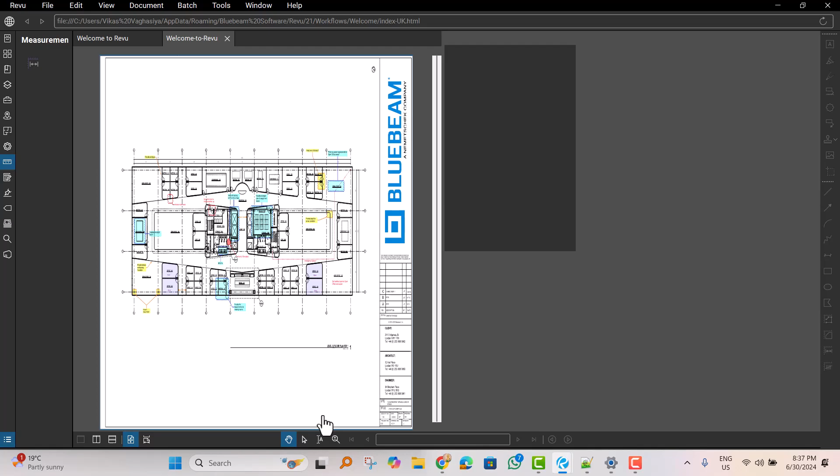First of all I am going to open the sample file. If you can't find the sample file, go to the Help menu and click Welcome to Revu, and there you would be able to find it. I am going to close this and work on this drawing. Initially I am going to remove the old markups over the drawing.

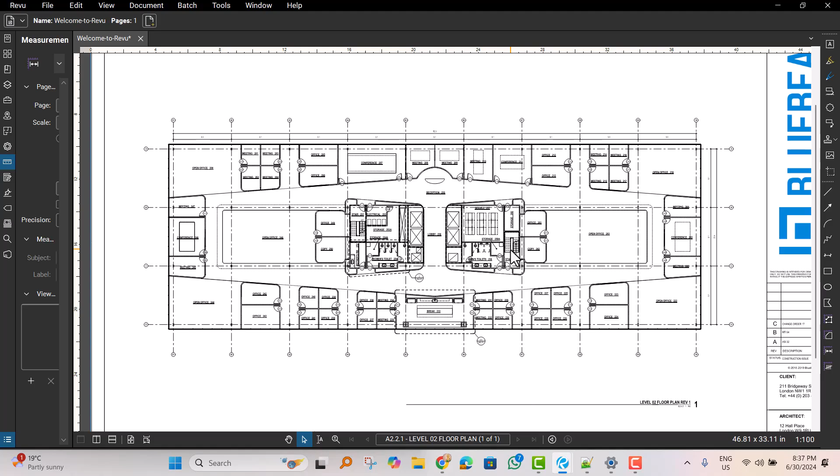First of all we are going to learn how to calibrate a drawing. There are basically two main ways to calibrate a drawing: first is based on the given scale at the bottom of the drawing, and second is with the help of given measurements on the drawing we can assign a scale. In this video we are going to look at both ways.

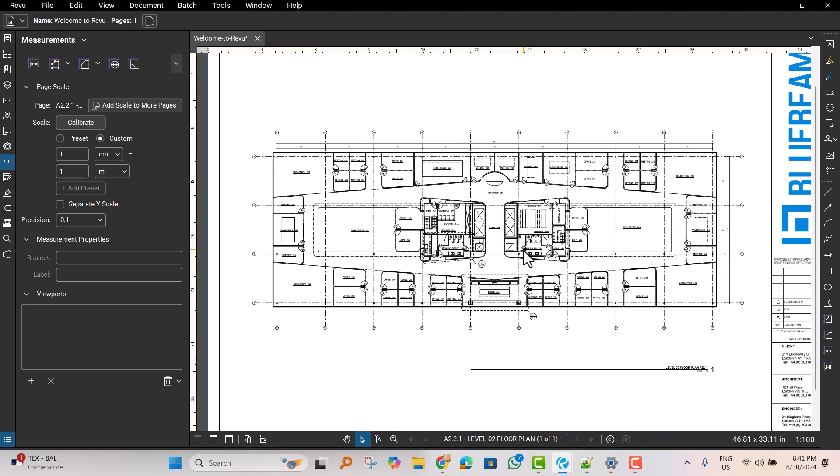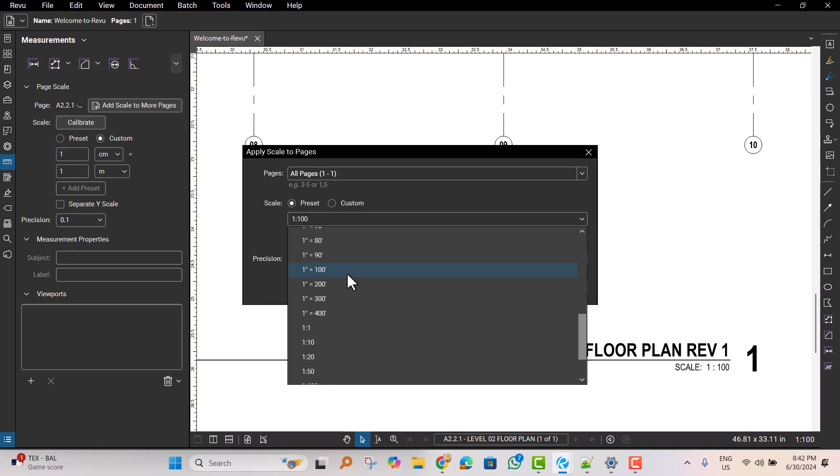Let's first see how we can assign a scale based on the given scale in the drawing. In order to assign a scale, I'm going to go to the right bottom of the software and click here, and for the pages I'm going to select all pages. For the scale I'm going to select preset, and in the different scale measures I'm going to select 1:100 as it is assigned on the drawing, and for precision I'm going to select 0.1, then apply the scale. So now this drawing has applied the scale.

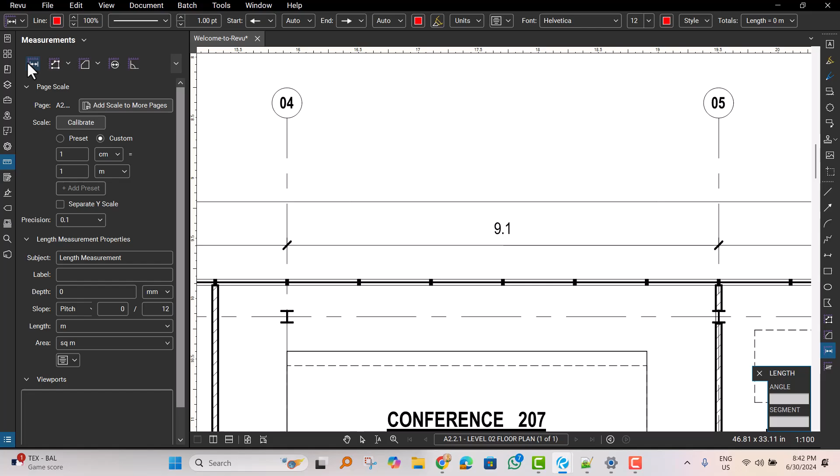In order to check if it's working or not, we can use one of the measuring tools, which is the length tool, and measure one of the given lengths, and here we can see that the applied scale is working correctly.

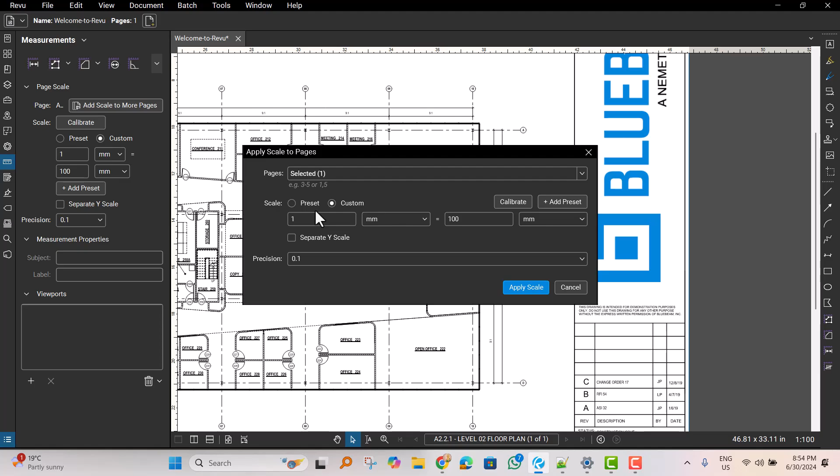Now friends, we are going to apply a scale to the drawing based on the given measurement. This method is used when there is no scale given at the bottom of the drawing. In this case we are going to take one of the longest measurements, as it can give us a more accurate scale. So here I am going to go again to the scale option, and this time instead of preset I am going to select custom, and then I will select calibrate.

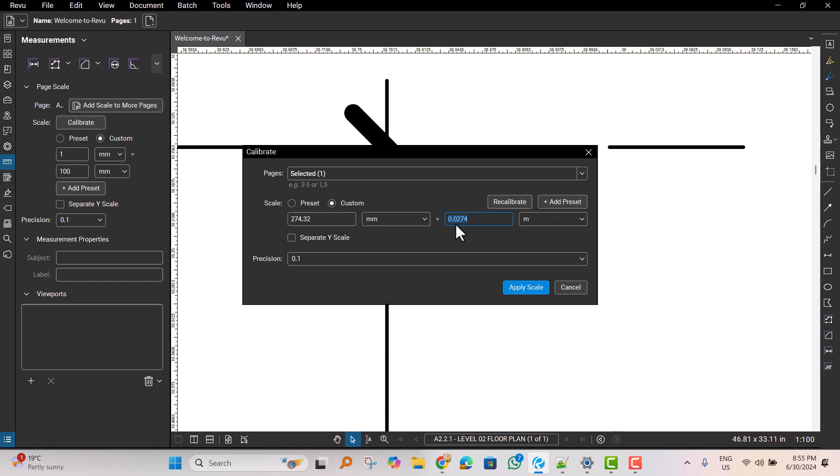I will press OK, and I'm going to select this length, 27.4, which is the longest length in vertical, from here to here. For that length I'm going to enter 27.4 meter, it will change again to 27.4, and then apply the scale. So now it has applied a scale.

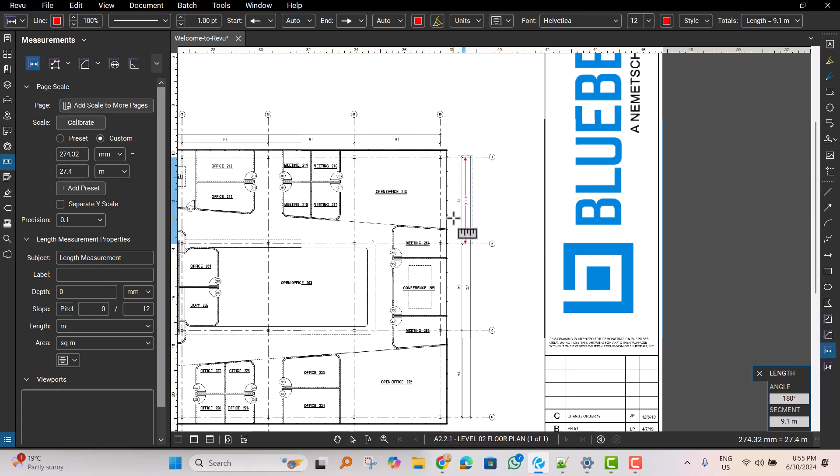I'm going to use one of the measuring tools, length, in order to measure and confirm. So from here to here we can see that it gives a length of 9.1 meter. So these are the main two ways to calibrate a drawing in Bluebeam Revu.

Now we are going to use different measuring tools in Bluebeam Revu. First of all I am going to use the length tool, which you have already seen. Before taking any measurement I'm going to look at the toolbar, where we can set the units.

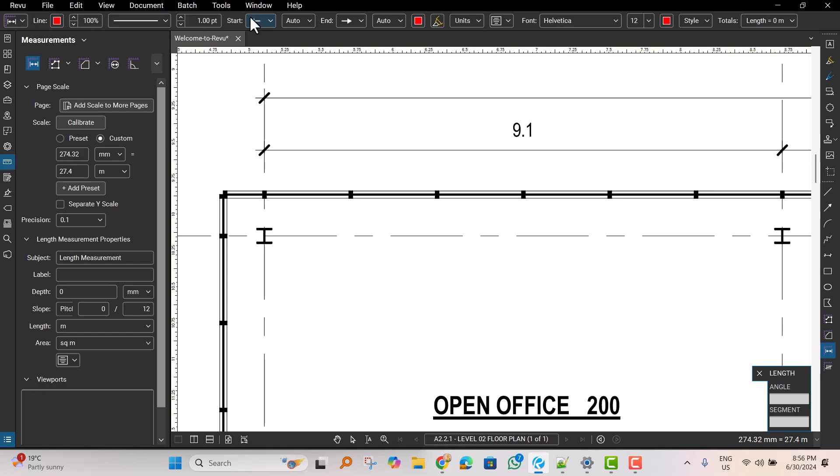For the length I'm going to keep it as meter, for the area, meter square. Depth we are not going to assign right now, as we are finding a length only. The remaining tools we will see later on. First of all I'm going to measure a length from here to here.

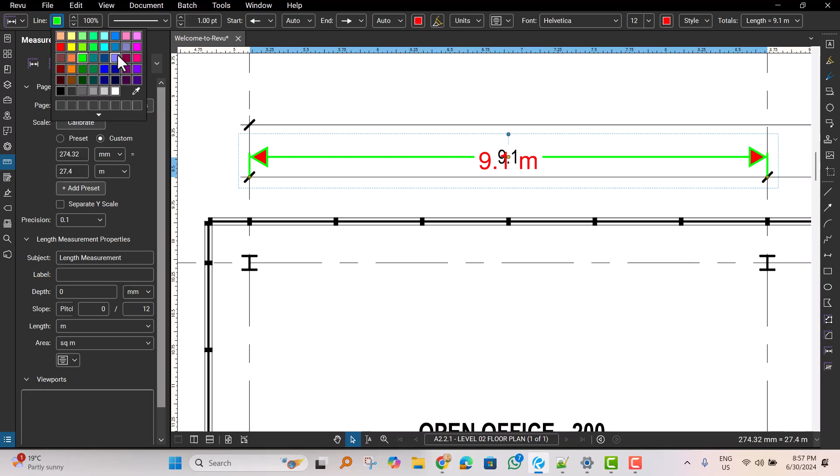In order to change the color or dimension, here we can see it has a line color, so I can change the color based on the selection which I provide. This is the transparency of the line, so it will reduce and increase automatically. This gives different line styles like dash line and many more.

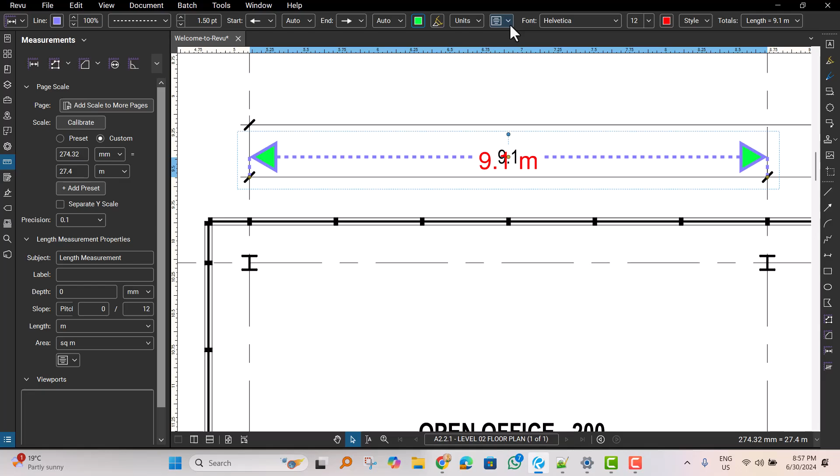For the points, it will increase the size of the arrow, and we can also change the ends of the arrow, like left hand side and right hand side. However, here I am going to keep the arrow as default. The color of this triangle can also be changed, and here unit and different font size we can change based on this, and we can also increase or decrease the font dimensions and change the styles, like keeping it bold or italic and many more.

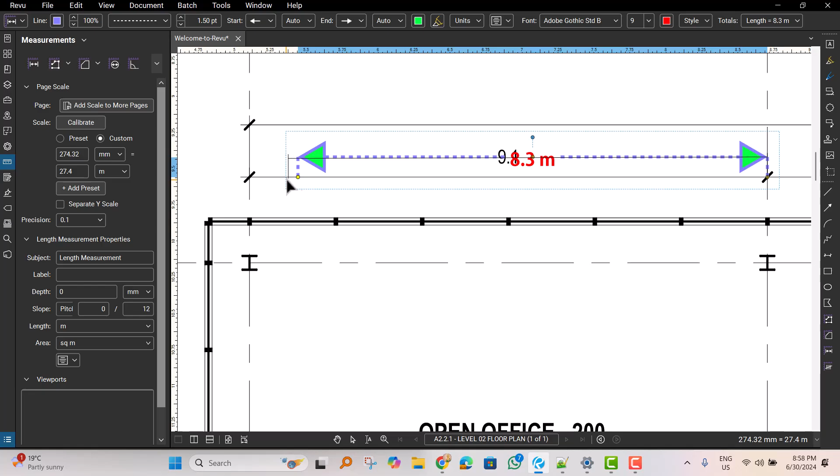So these are the tools mainly used for the length. In order to change a length I can just select this point, press the shift key to take it completely horizontal, and then leave it, so it will change the length automatically. So again I'm going to put it here.

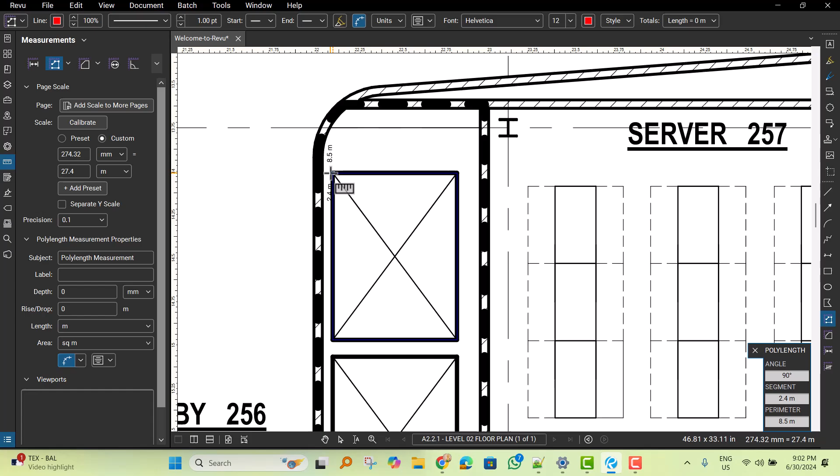So the second tool we are going to use is the Polylength, which can be used to measure the length of a rectangle or any polylines. So from here to here, I can measure the whole length of the rectangle by clicking each corner one by one, and here it gives the total length.

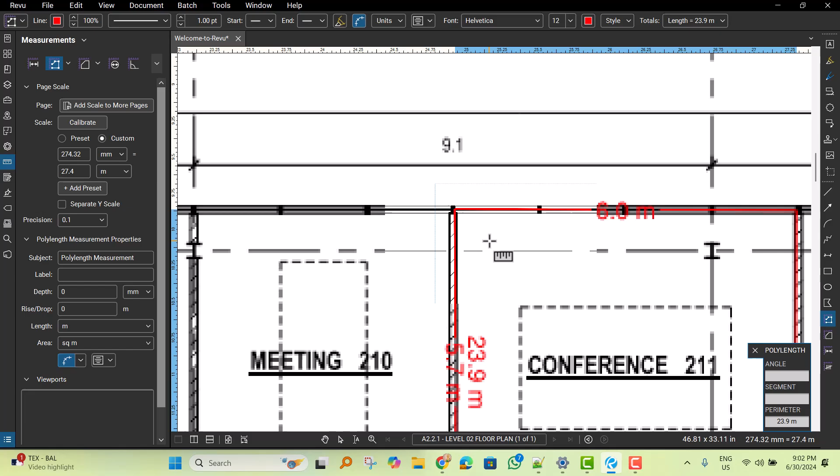Similarly, I can do this for each room, clicking from here to this corner, to the bottom right corner of the room, then bottom left corner again, and then clicking back to the top. This way it can give me the length of each wall, like from here to here it's 6 meter, similarly for all 4 walls, as well as the total length, which is 23.9 meter here.

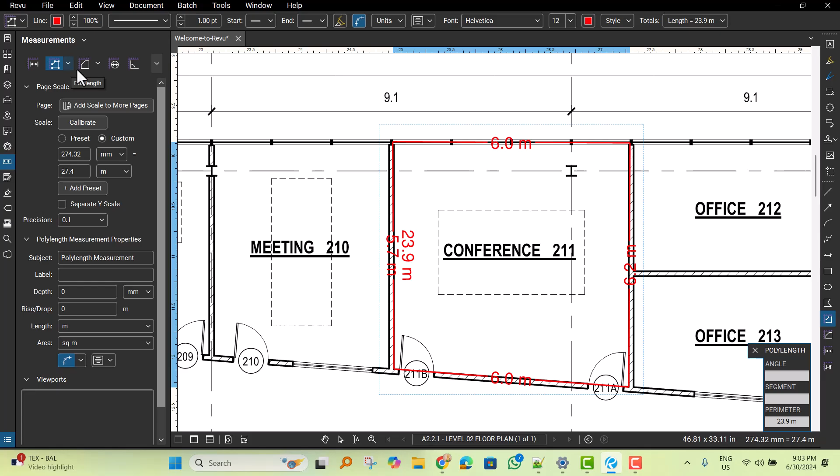Now the third tool we are going to see is the area measurement. In the measurement tool, we are going to select this third one, which is the measurement of area. In order to measure the area of any room, we can use this tool. So from here to here, and then up to here and till here, I'm going to select and then double click.

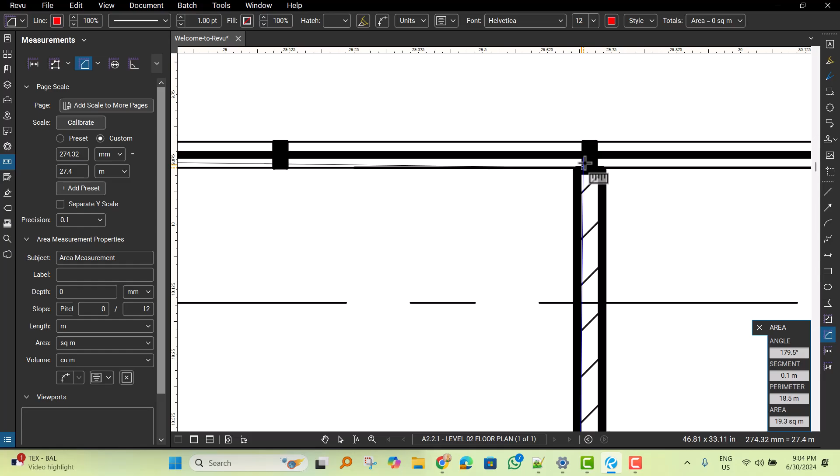So it is going to give me the area, which is 19.6 square meter. In order to change the line color or the area color, we can choose different options. Like here I'm going to select the hatch, so it will give me a hatch, or inside that we can make it a little bit smaller.

Furthermore, what we can do in this area is give a depth, and based on that we can also measure a volume. So for that I'm going to click here in this area, and then look in the left side menu, and we can see the depth option is given. So for that I'm going to click meter, and for trial purposes I'm going to select 3 meter depth. So now it has given a volume for this much area.

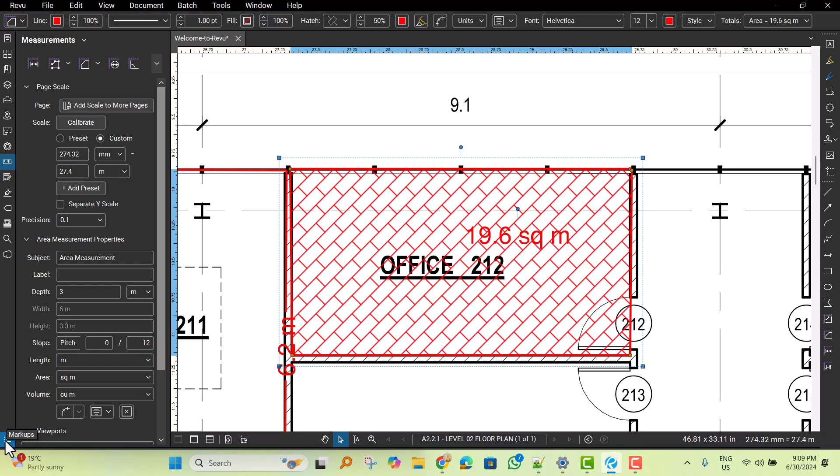In order to look for that volume, we can go and look for the different markups at the bottom left of the software screen, and then here we can see that different markups are given for all of the tools which we have used currently on the plan. For this area, we can see that there is a length and area given, but we can't see the volume column over here.

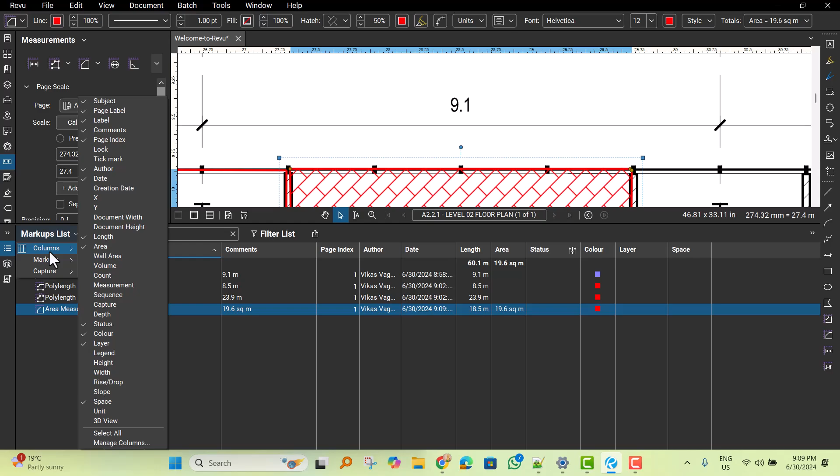So in order to add the volume column, we will go to the markup list, then column, and then here we are going to select the volume. So we can see that for this room, the area is 19.6, overall length is 18.5, and the volume is 58.7. So this way we can find the length, area and volume of any given plan on drawing by using these tools.

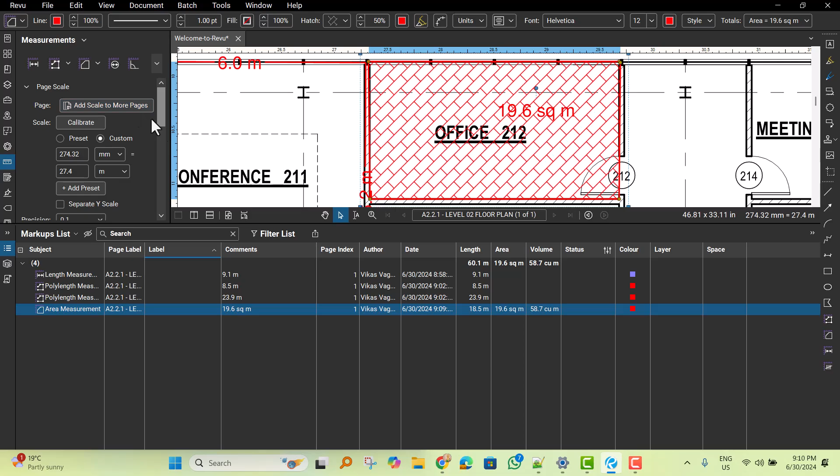Now what we are going to do is very important, as for the area finding of this room, there was a very clear line given. However, what if there is an irregular shape of a room? Like for example, for this room here a curve is given, and here its door is also opening.

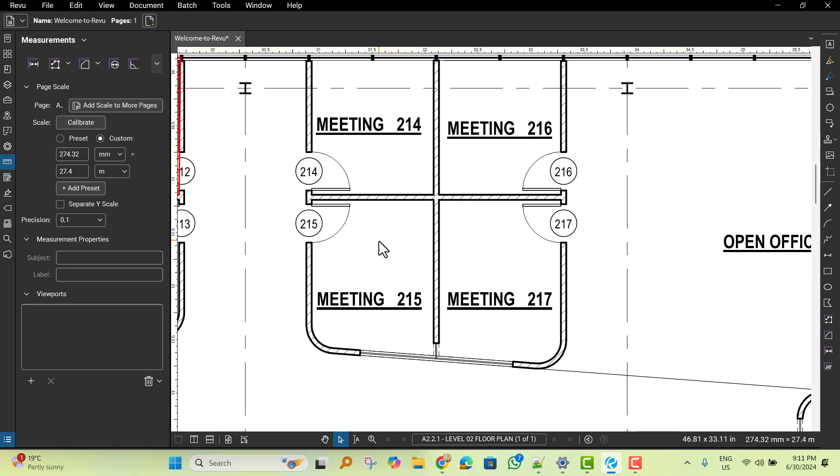So if I want to find out the area for this one, then we are going to use a dynamic tool, which can be used to find irregular shape area. So here I am going to go into the tools option and select measurements, and in that I am going to select dynamic fill, and then here we can change the settings.

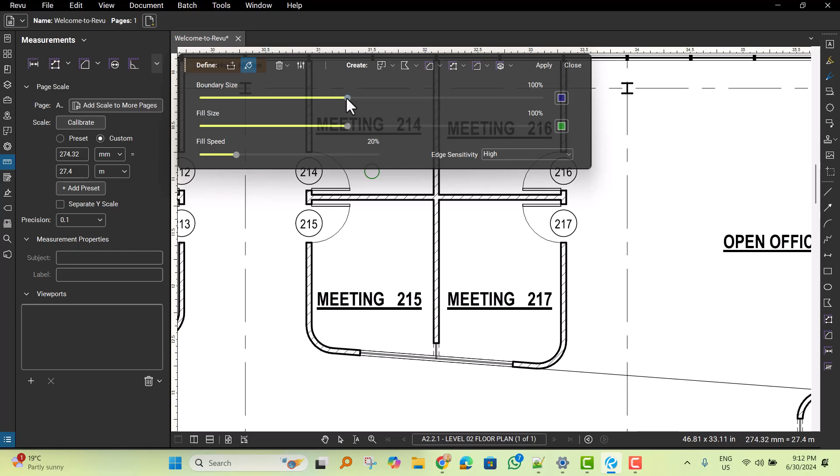So for the fill up area, we are going to select fill options, and here the selection is very large, so I can reduce the boundary size, fill size based on this line, and then we can increase the speed of the fill, and I'm going to press a long click over the room. So here it is going to find the area of this irregular shape.

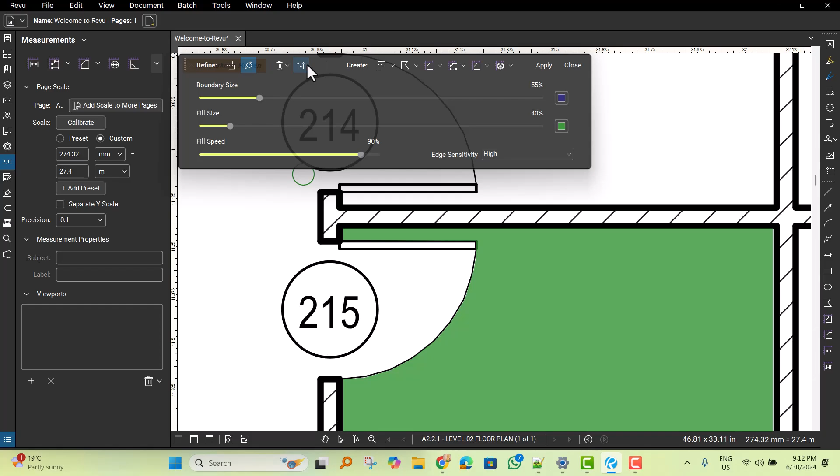However, the door is not getting covered as there is a line, so we can provide a boundary here in order to fill up. Like for example, if I'm going to go and fill up here, then it will spread outside. So I'm going to press Ctrl Z.

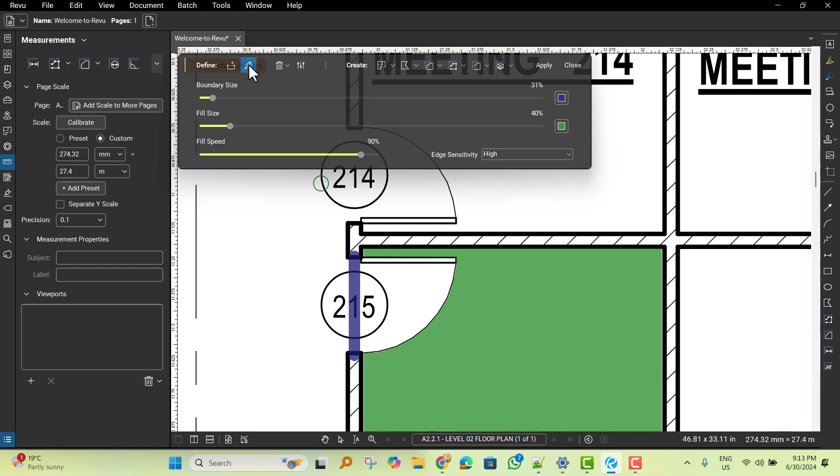Now I'm going to click and select this boundary, and create a boundary. However, this circle size is very large, so I'm going to make it a little bit smaller, similar to the wall. And now from here to here I'm going to double click. I'm going to use the fill options again and then click here. So now we can see that the whole area is covered with the help of this dynamic fill tool.

And then I'm going to select in the above options the area measurements and area, and then apply. Here we can see that it has measured the area of the irregular shape, which is 10.1 square meter, the best way to find out the area of an irregular shape.

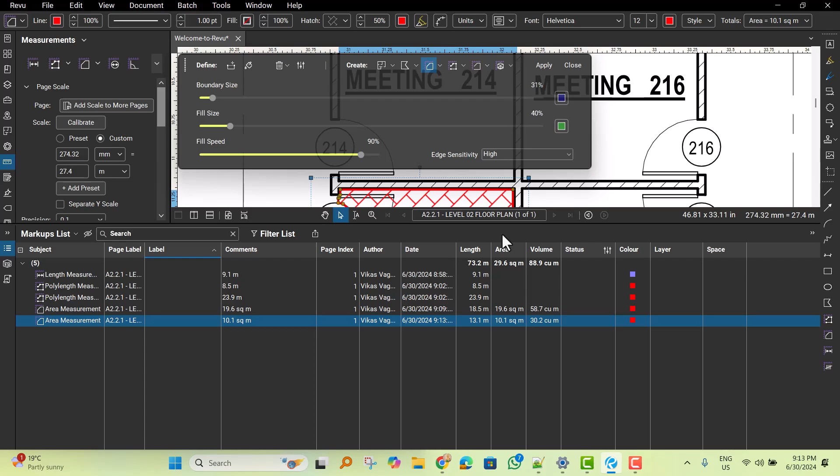And for that we can also assign a depth here, 3 meter, and it can also be used to find out the volume of this room. For example, we can go to the markup and see that for this room the volume is 30.2 cubic meter. So by use of this dynamic fill tool we can find out the volume as well. I'm going to close this one.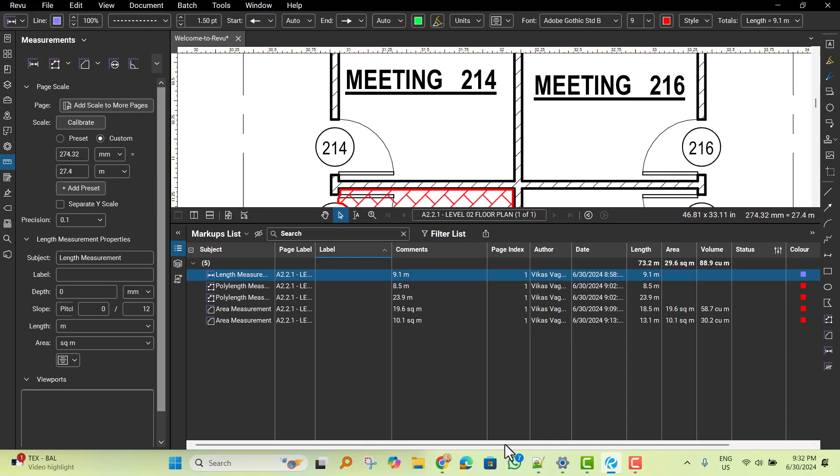So far this was all the basic measurement tools for length, area and volume in Bluebeam Revu, and we can also see all the markups here. Like for example, you have to click here in order to open up the markups, and all the markups are given here. We can also export this markup into a Microsoft Excel file.

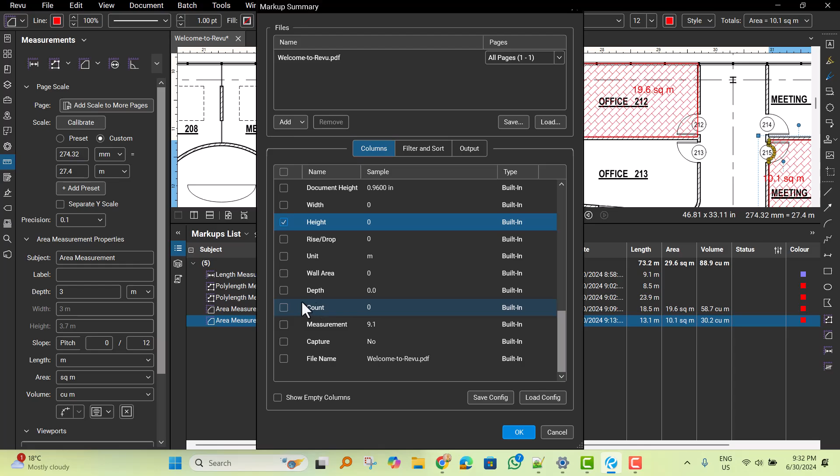Like here the option given is summary, and I'm going to click CSV summary. Here in the column section we can select which column we want to extract. So here I'm going to select height, and count will be the same, and then for the output I'm going to select the location in the download folder and then press OK.

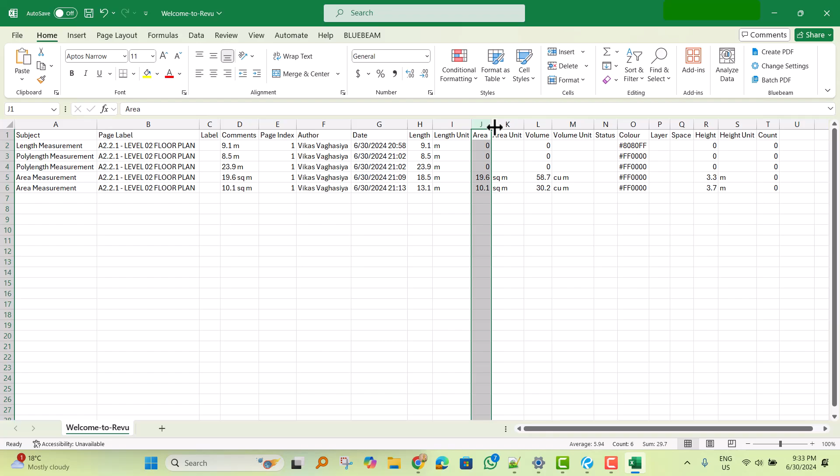So here it is going to open all the markups drawn on the drawings, and we can also see that it has given it in the form of an Excel sheet, where I can find the length, area, the unit of the area and the volume of the measurements.

So throughout this time we took measurements on the drawing. All the drawings we can export to an Excel sheet and do calculations on that or manage it there. Thank you for watching the video.